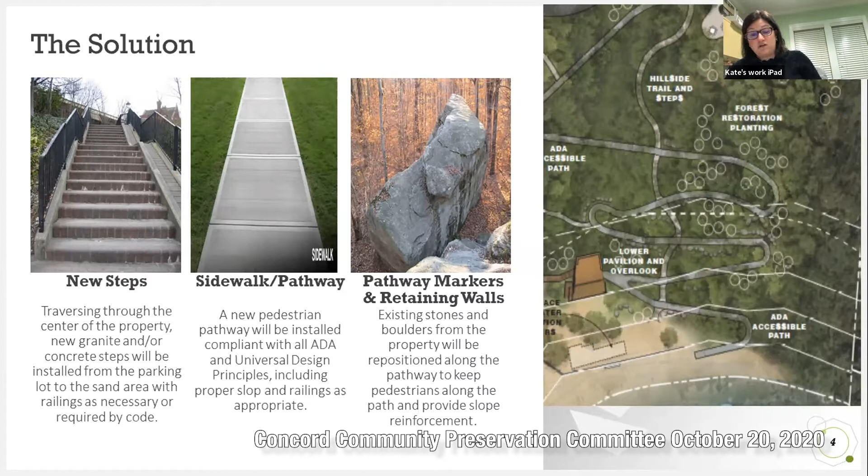In addition to the modifications along the hillside, we also propose modifications to the lower roadway area adjacent to the boat launch, including wooden decking leading to and from a dedicated parking spot and drop-off area, and to and from the existing seasonal restroom facility, which is the restroom trailer. We also propose a fully compliant ADA mat, installed in the last section of the ramp over the sand to provide direct water access for wheeled mobility aids. This ensures that no permanent impervious surfaces would be erected within the 25-foot wetland buffer area. This low-impact, fully removable system will allow compliance with ADA while ensuring sustainability and protection within the major resource area.

Next, as alluded to before, part 2 is stormwater management, an equally important factor related to the proposed improvements. When designed properly, a comprehensive stormwater management plan and system can reduce runoff and improve water quality in and around the pond and resource area. This has become a hot button issue for both the community and abutters, as we've seen a decrease in pond quality over the past 10 years.

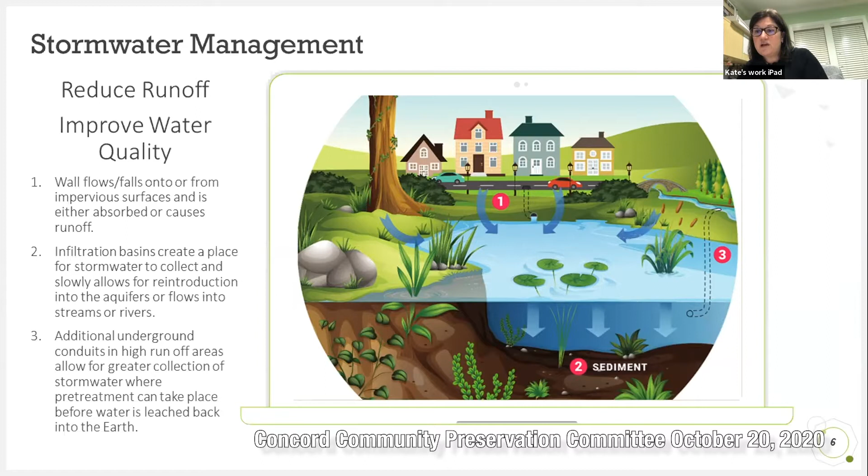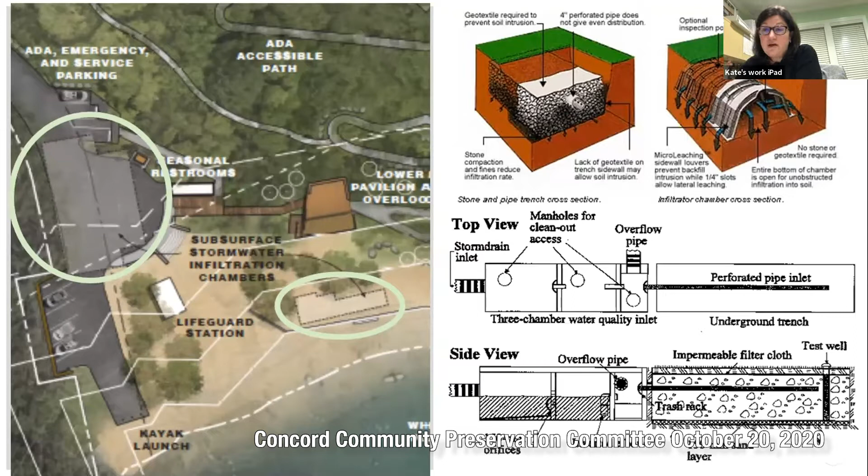A large stormwater infiltration basin, as said before, will be constructed at the top of the property near the parking area. This type of open air basin is considered green infrastructure, which encompasses new approaches and technologies that work to infiltrate, evaporate, capture, and reuse stormwater and retain natural landscapes.

We plan to have several smaller scattered natural bioretention areas, often referred to as rain gardens, which capture water by reducing flow rates and helping with total water quality and pollutant runoff from impervious surfaces, such as our proposed ADA walkway along the hillside. It will also deter people from going off the access areas into other parts of the reforestation efforts.

The estimated cost for the majority of these stormwater management efforts described is anywhere from $300,000 to $400,000. This application is seeking $127,000 from CPC to cover some of the stormwater management efforts.

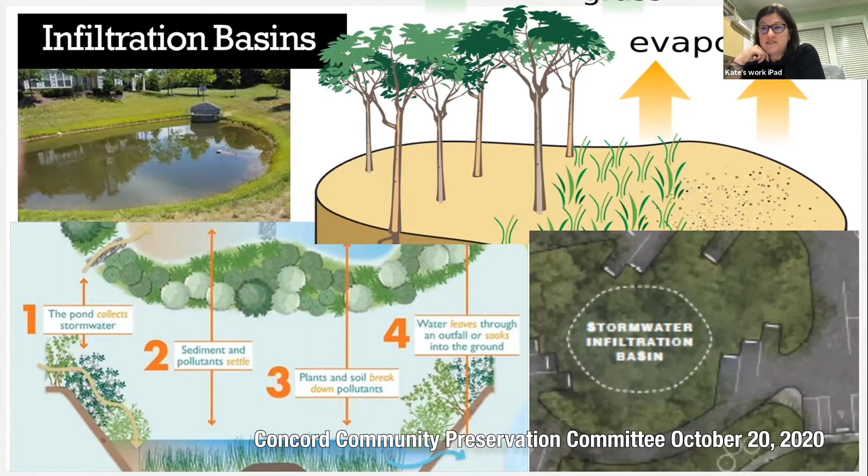Keeping that amount at under 30%. Next slide, please. The schedule here shows a timeline thus far and in the future, pending the availability of funds. The bottom line is that should funding efforts be successful, initial construction could commence in spring 2021, providing all necessary permits are received and the community has decided on a design.

Again, we're requesting $300,000 from CPC for fiscal year 22: $173,000 for access, $127,000 for stormwater efforts. Next slide, please.

This is just another visual timeline highlighting the funding milestones. As of now, we anticipate requesting between $500,000 and $600,000 in the fiscal year 22 capital budget, which will be voted on at the June 2021 annual town meeting.

Next slide. So the overall project cost for stormwater and access improvements is estimated at about $1.47 million. This amount includes a project contingency of 10% and a price escalator of 3%, accounting for the dollars outlined here being at 2020 rates.

The tables at the top represent the funding needed by area or focus. Area 1 refers to the driveway and the lower waterfront and restroom portion, and Area 2 consists of the hillside areas and the parking lot.

The table at the bottom represents the town's funding strategy to date, combining fiscal year 20 CPC allocation of $250,000 with this year's capital amount of $600,000. We have $850,000 available to begin the work.

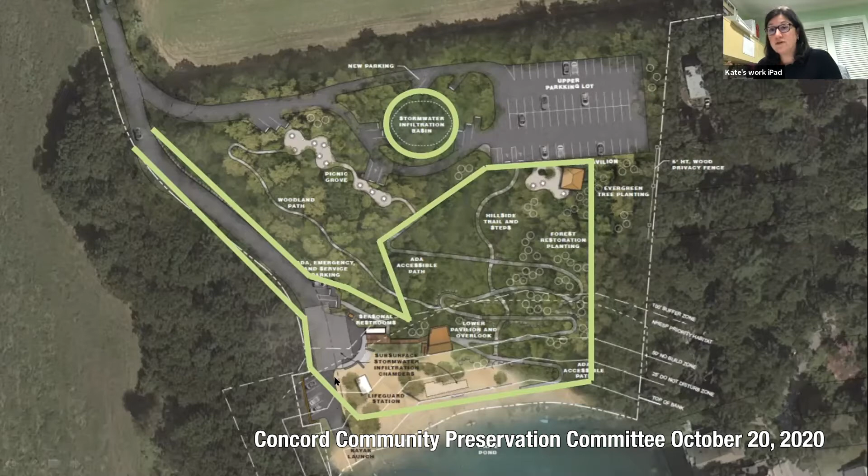Thank you very much. Other members of the committee? Judy. Since the state owns the access, I just want to double check, is there any opportunity to get funding from them to help with the stormwater management?

Other committee member questions? Nancy? Remember your mute.

I'm sorry, Kate, I'm coming back to a question I asked before about the zigzaggy path, the ADA path. Your memo of September 21st said you guys were going to roll out several universal design concepts. Was that related to the path? Then maybe there's some options there for what's always been shown.

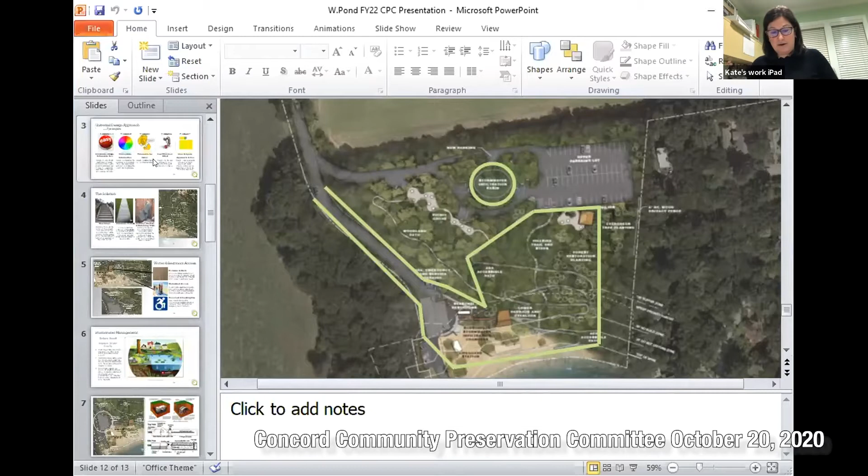Kate, is anything planned for the bathrooms? Or are you going to just keep what you have as you move forward? Sure, yeah. Heather, do you mind going back to... I'm gonna have to figure this out. Let's try slide number 3. I don't know if that's it, if I can remember. No, that is not it. Five, perhaps.

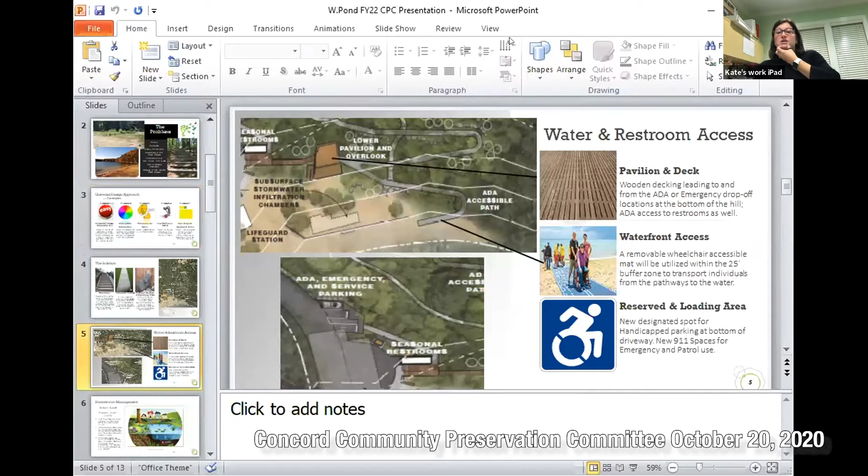Yes, so on this you see that white rectangular box at the top left-hand corner. That is the restroom trailer. It's existing; Ryan Kane and his team have purchased and maintained that, and it will be staying as the restroom facility. If you were down there, you know it has a lift that comes down for ADA accessibility, and you press the button to get the lift up. Sometimes that can be a little tricky, particularly with sand. So what we propose is this wood deck that basically has a ramp, with a small pavilion area—although we're not having any overhead pavilion, just the deck—that comes down so you'll be able to access the trailer. The nice thing is that there's nothing going into the earth. We're not putting any water lines down there, no sewer, no septic, and that seasonal restroom can be taken away in the wintertime if we need to and stored. We're thinking that might deter people from coming down when the beach is closed, maybe or maybe not. So the restroom remains, but what's around it and its access is improved.

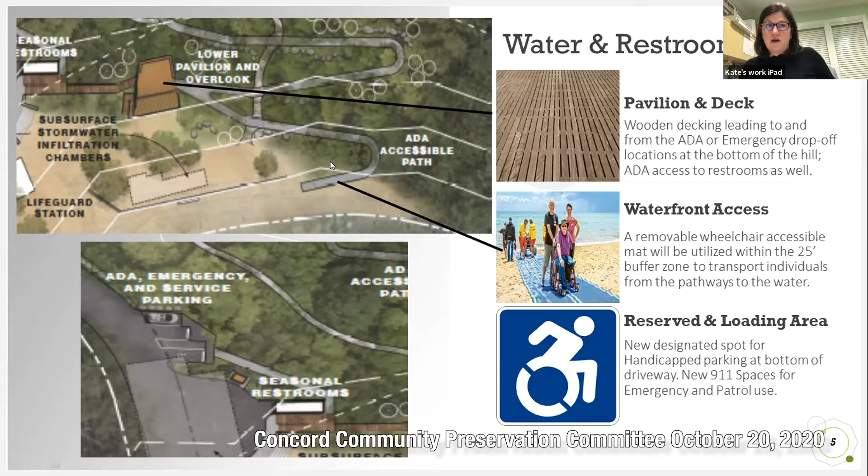Thanks. And the $250,000 that was just voted, what is that going to be spent on? I'm sorry, just loaded. You mean fiscal year 20's CPC appropriation? Yes, yes. Okay, that is for part of the access and ADA modifications. The total amount for access and ADA modifications is around $500,000. We're using the initial $250,000, which was the request we made back in fiscal year 20, and then asking for an additional

$173,000 from this application, and then the rest we're going to supplement from capital. Thank you. Judy? Yeah, I just had one other question on the budget, Kate. If I recall in your presentation, you mentioned the total budget was $1.42 million. Is that correct? 1.47. Okay, because I'm looking at the sheet you provided, which is very helpful, and maybe I'm reading it incorrectly, but I see it's $1.496 million. So that includes site amenities—miscellaneous site amenities that would not be paid for from either CPC or the general fund. I wanted to capture that because that would be part of the operational expense that recreation incurs, but is still part of the overall project. But that's consistent with what we were talking about when we accepted the gift at that special town meeting: the town would be responsible for capital, but recreation would be responsible for site amenities and upkeep, which is why we charge membership. Okay, great. Thank you.

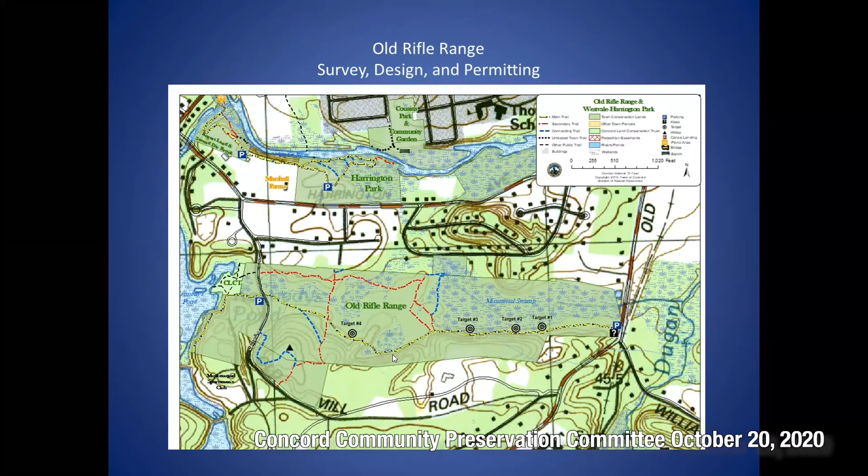So sorry for the long response, but in answer to the question, I don't anticipate there would need to be an extension of the scope of the project to accommodate that additional narrow area between targets 3 and 4. Okay, thank you.

Welcome. Peter, other questions? Thank you, Delia. No, other members of the committee? Questions for Delia?

John. Delia, do the targets have any historical significance? Are they of any interest in your maintenance of the trail?

That's a great question, and I did reach out to Heather Gill when I was submitting the application for Mass Trails, and because they're over 50 years old, they do have some historical significance. They're concrete structures backed by a soil berm.

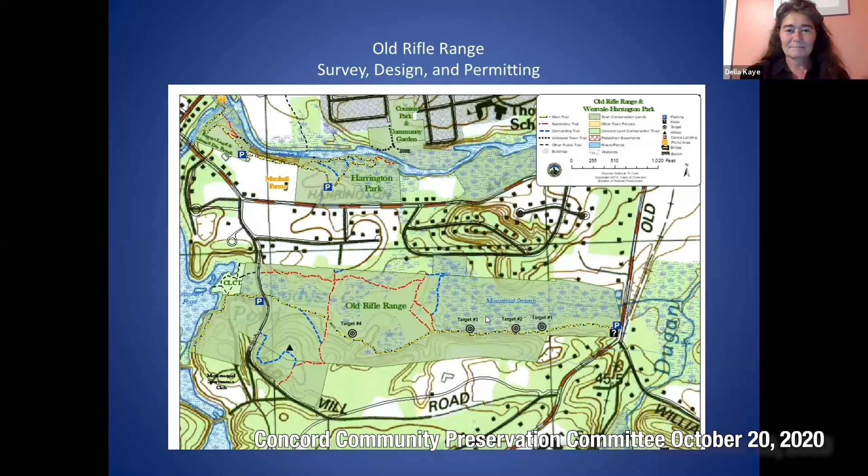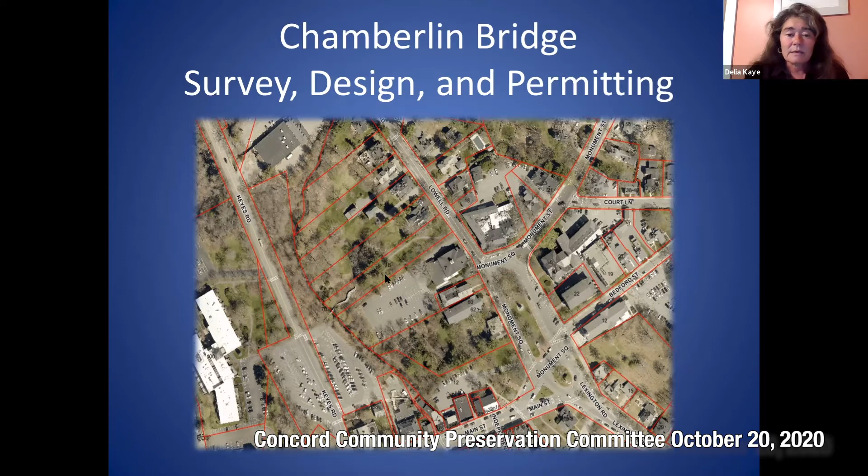So our goal for this, in terms of what we're requesting in funding, is to obtain survey, permitting, and pathway design for this project. In terms of whether we would come back for funding—I'll anticipate the question—the bridge estimates looked at the overall project cost at $283,000. And that's only having to replace a few of the piers in that sinking section of the observation platform.

But 85% of that was from demolition. So part of this phase of the project would be to look at whether we could do that demo in-house. Then my goal would be to come back to CPC and request construction funding, but to also go to the trustees of town donations, which holds the gift that was initially set up when the land was gifted. They have refused that in prior years, but I think it's worth asking the question again.

Thank you, Delia. Nice presentation. Our liaisons, I believe, are Judy and Paul. Judy? Delia answered my question that I was going to ask about potential future funding to build the bridge, so I did not have any other questions. Thank you, Judy. Paul? Yeah, that was my question as well, but I only have one other.

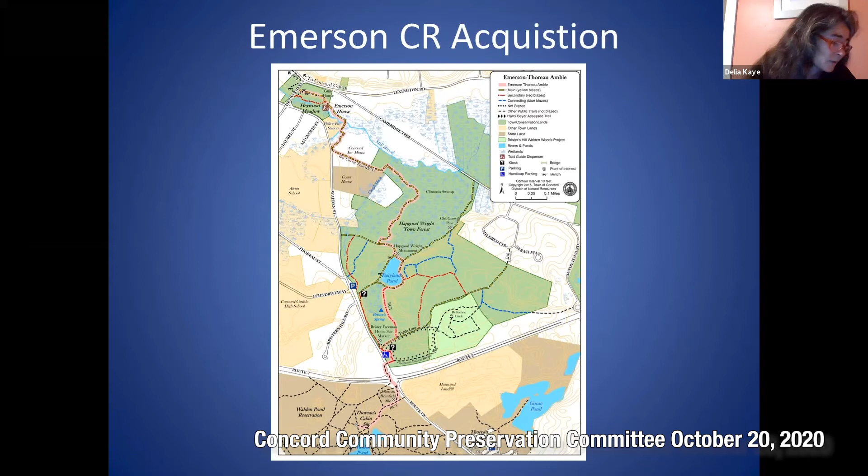The land was appraised in 2018 at $650,000, and we have negotiated a purchase price with the Emerson Association for $560,000 for the conservation restriction. So the CPA request would be $210,000, and it would be a project match through town funds of $355,600.

That is for the purchase price itself, development of the conservation restriction, and installing 2 bounds to delineate the property line at this point here and this point here. I don't think it's necessary to do it between, this is town conservation land here, so just these 2 bounds here. And with that, any questions?

Thank you, Delia. For this project, we have 3 liaisons: Judy, Nancy, and Diane. Judy, questions for Delia? Yes, to make sure I understand, so...

The town would not own the property. That would still be owned by the association, is that correct? So the fee simple would continue to be owned by the association. What the town would purchase is the development rights on the parcel. So there would be no ability to, it's a buildable lot. There would be no need or no ability to construct anything other than have the trail through that parcel.

Okay, and the only public access that would be permitted is the trail itself on the property? Correct. Well, that's actually a good question, Judy. I mean, generally conservation restrictions are written to, you know, you can provide broad public access or you can provide access limited to the trail.

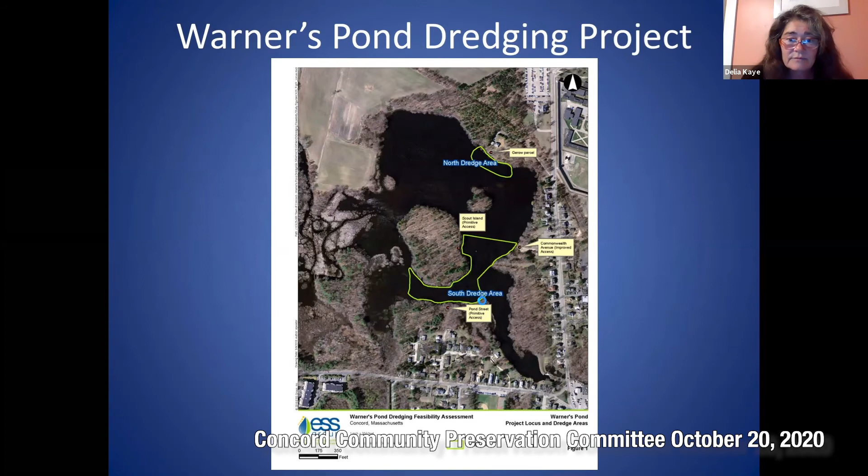So we had the conceptual plans developed. We received our MEPA certificate last year for the dredging, and were awarded funding in last year's CPA cycle for permitting, a year-long process. CPA at the most recent town meeting approved CPC's recommendation for $500,000 in dredging funding last year for construction costs. This request is for $250,000 for the upcoming town meeting, and the total project cost is $2.5 million, which includes improvements to the boat launch access itself. The remainder of funding would come from the town's capital budget.